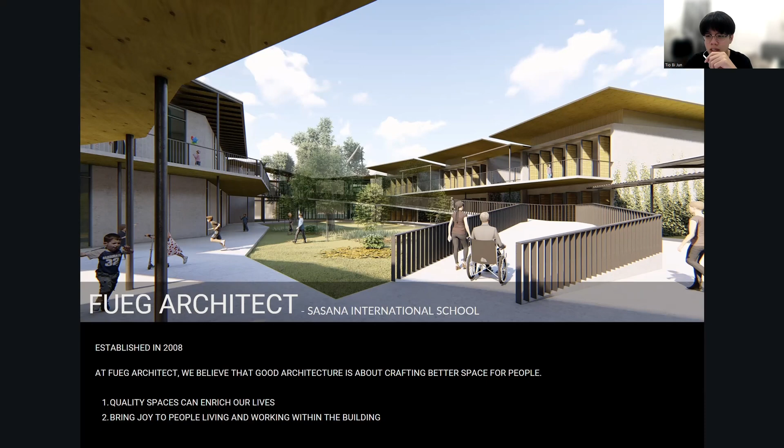Our practice has always been about defining architecture in modernity and practicality, accentuated by the simplistic yet honest design approach.

For example, our office was remodeled from an existing commercial lot design. The intention was to present the office in an open space planning while using selected material to enhance the spatial experience, such as the first one, recycled Cengal wood, and second, polished cement screed flooring. We have used these two materials for the design of our floor.

Then the third one is a raw style feature brickwork, which we used as a hierarchy element in our office. The last one, we used cement finishes and white plaster ceiling to design the ceiling, so the ceiling displays the beauty of even unpretentious design.

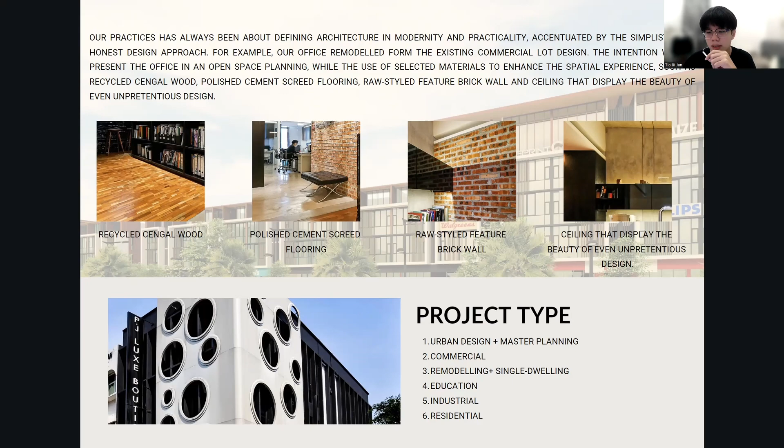FUEG Architect is involved in urban design plus master planning, second, commercial, third, remodeling plus single dwelling, fourth, education, fifth, industrial, and the last one is residential.

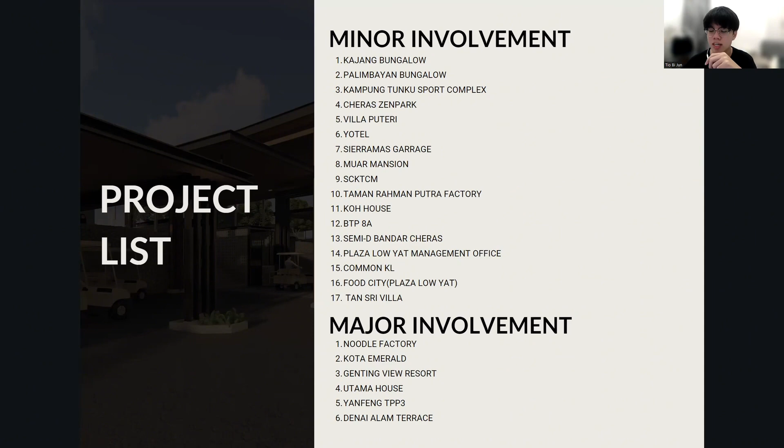Throughout my 6 months of internship, I have separated my projects into minor involvement and major involvement. The minor involvement means the project involved me only a little, but the major involvement is the project fully handled by me.

Kajang Bungalow: the client has bought an existing bungalow at Kajang area, and he required us to design the layout of the existing bungalow according to his family needs, and also an extension at the back of the building. We designed the extension area according to the existing bungalow design language, so it looks harmonious with the existing bungalow. The job involved was I was assigned to amend the drawing, including the plan, section, and elevations according to the client's comments.

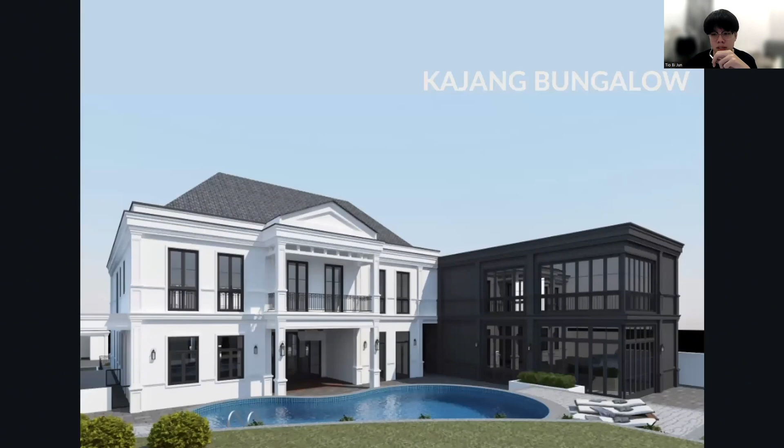The extension part of the Kajang bungalow was the black painted building as shown in the slide. The two drawings shown here are part of the drawings prepared by me.

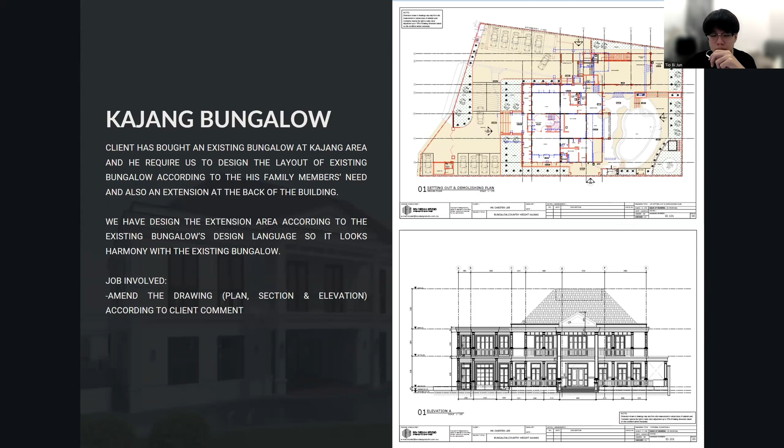Palimbayan Bungalow: this project is 3 different design and build hillside bungalow projects from our company, located at Palimbayan, Kuala Lumpur. The first one is a 1-story bungalow, second one is 2-story, the third one is a 3-story bungalow. The job scope for me is the case study of the bungalow and also designing the circulations and function space of the bungalow.

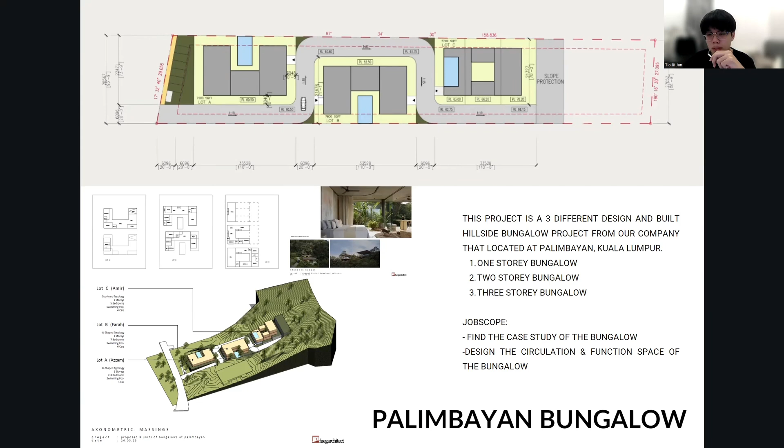Then there's the Kampung Tunku Sport Complex. Kampung Tunku Sport Complex is a design and build project that will be located at Petaling Jaya. We are involved in design, tender, and build process.

The job scope for me is to amend the existing BP drawing, plan, section, and elevation according to the authority's comment, relocate and resize the window and building leveling and the staircase, and I was assigned to do the mood board for the client to feel the real material texture. The drawing shown here is one part of the drawing prepared by me, and the mood board here is the mood board I prepared to present to the client.

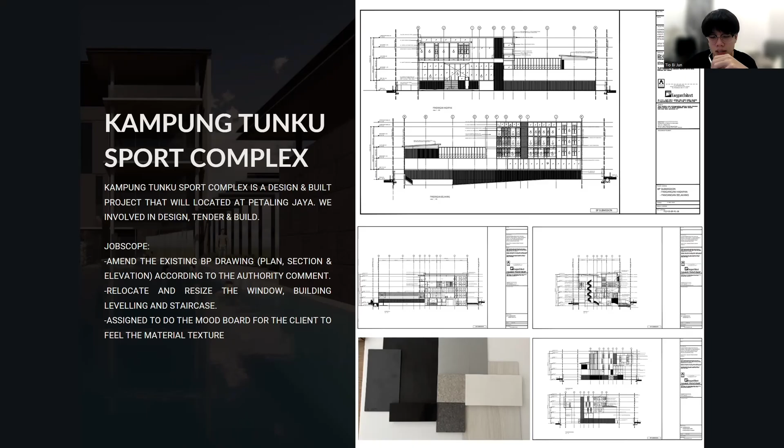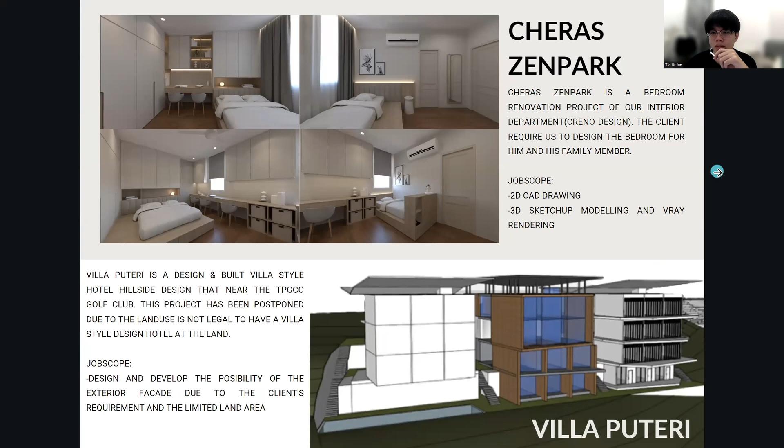Then is the Cheras Zenpark, a bedroom renovation project of our interior department, Creno Design. The client required us to design the bedroom for him and his family members. The job scope for me is 2D CAD drawing and also the 3D SketchUp modeling and V-Ray rendering. The 3D view shown here is after the CAD drawing, then I prepared the SketchUp modeling, and after that used V-Ray to render it.

Then is the Villa Puteri, a design and built villa style hotel at the hillside near the TPGCC Golf Club. This project has been postponed due to the land use; it's not legal to have a villa style design hotel on the land. The job scope for me is to design and develop the possibility of the exterior facade due to the client requirement and also the limited land area.

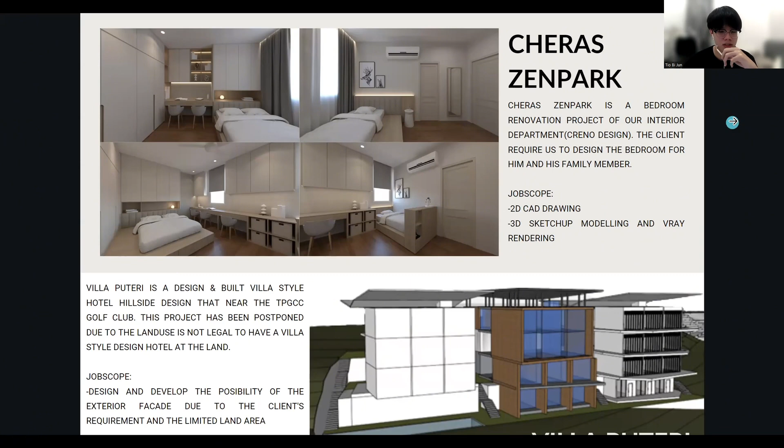Yotel is the existing hotel located at Bukit Bintang area. This project client required us to renovate and design the hotel interior by using as much existing design element as possible. The job scope for me is to amend the CAD drawing, render it, and also arrange it into a portfolio together with the 3D view of each room type, ready to present to the client.

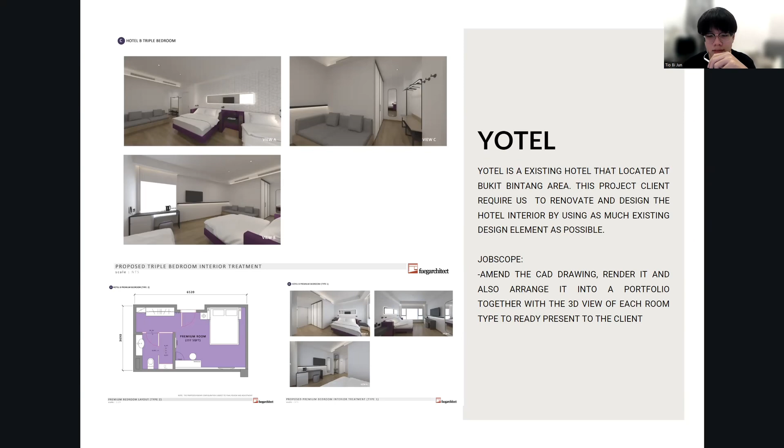Picture shown in the slide, the first one is the 3D vision view. Then the second one is the rendered floor plan. The third one is the 3D view of the type 1 room type.

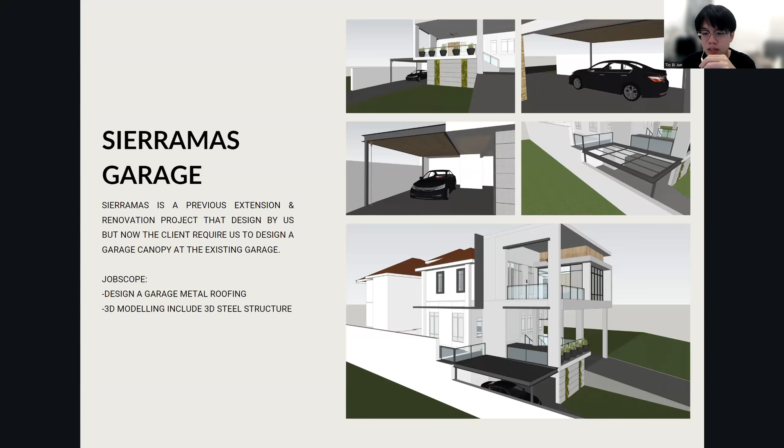Then the More Mansion is a bungalow that required us to do the interior and exterior facade design. The job scope for me is to design the 3D fence design.

The SCKTCM is a charity project that required us to design and draw the lighting and M&E plan for them. The job scope for me is to prepare the RCP of the plan for them.

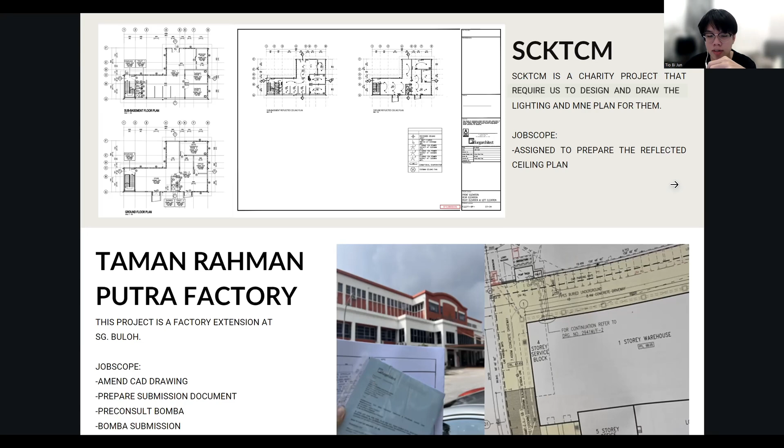Koh House is a design and build bungalow project. The client required us to design the exterior facade and interior design of the bungalow for office use. Unfortunately, after we finished designing and proceeded to the submission process, the neighbor complained and caused the project to be terminated.

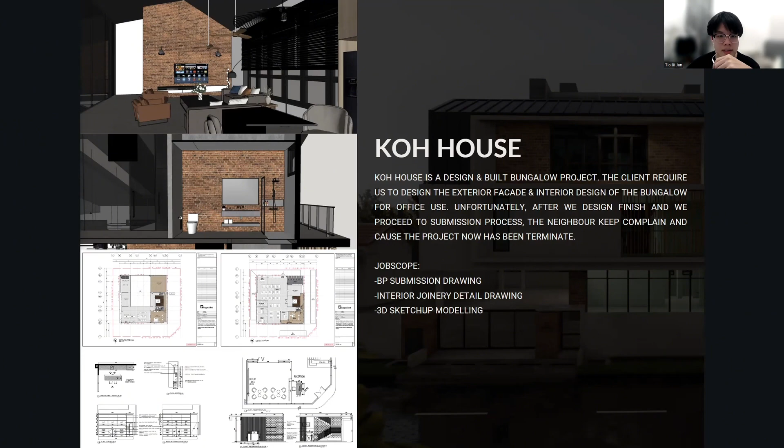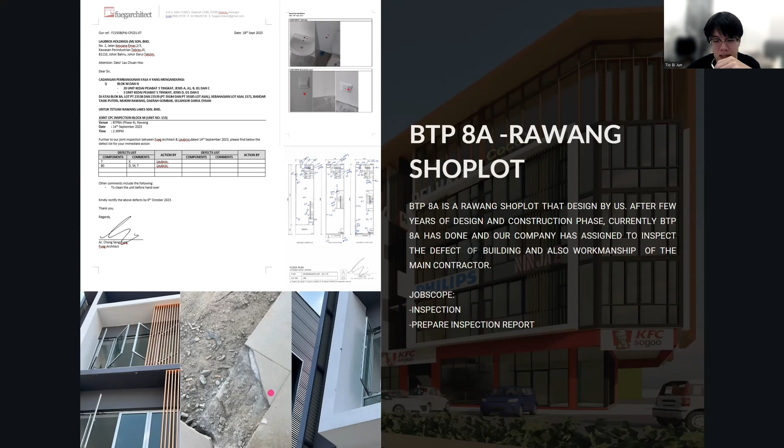The image shown in this slide is the picture that I took during the inspection.

The Plaza Lowyat Management Office is a design and renovation of the Plaza Lowyat existing management office. The job scope for me is to have a meeting with clients and also take some site photos as future drawing reference.

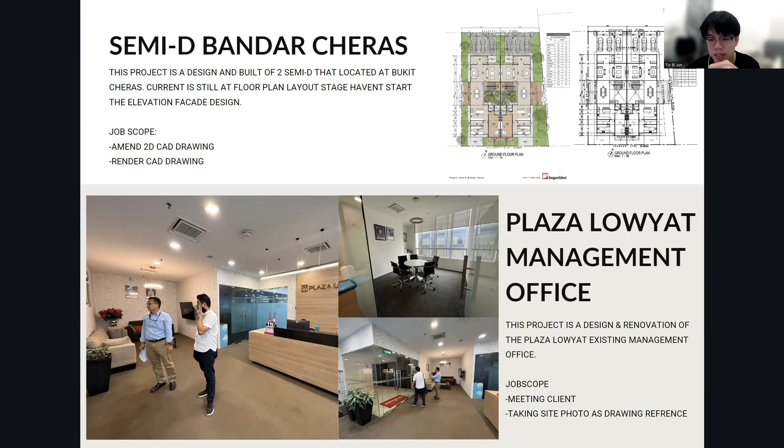Common KL is also a project from the Lowyat group. It is an existing shop lot that is already in operation.

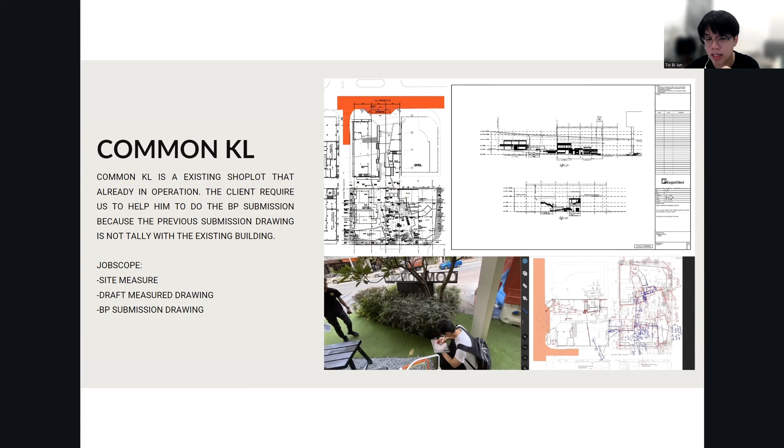The client required us to help him with the BP submission because the previous submission drawing did not tally with the existing building. The job scope included site measurement, draft measured drawing, and BP submission drawing. Both drawings shown here are part of the drawings I prepared. The image shown here is the site picture I took during the site measurement, and the last one is the notes I took during my site measure.

Food City is an all-new proposed food court in Plaza Lowyat. We were required to design it, and I was involved in this project during the tender process. My job scope was the tender drawing, including the plan, section, elevation, joinery detail, and section detail. The drawings shown here are part of what I prepared - the first is the plan and the second is a section detail drawing.

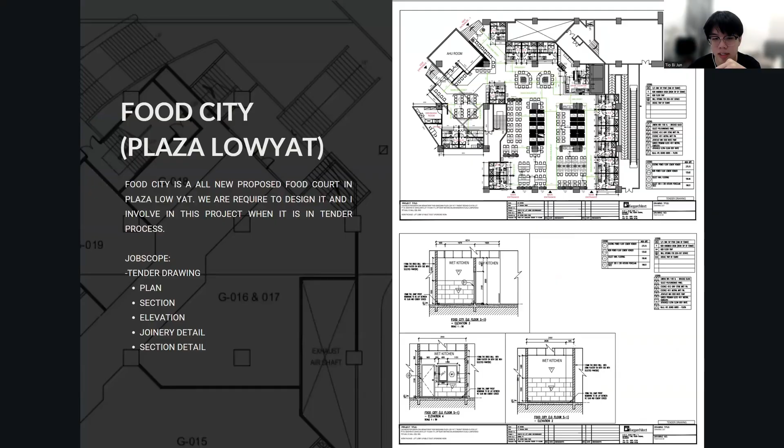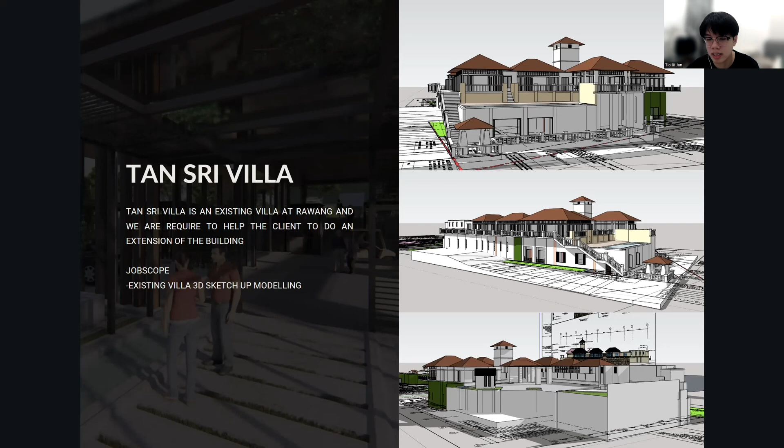Noodle Factory required us to design and build the factory for him. This is my first own project, and I was assigned to design the exterior facade design and also the steel structure support system of the factory. The job scope is exterior facade design and the steel structure support system.

The first image shown here is the steel structure 3D view that I designed. The following two perspective views are the exterior facade design, and the last one is the interior perspective view. Then we move to Kota Emerald.

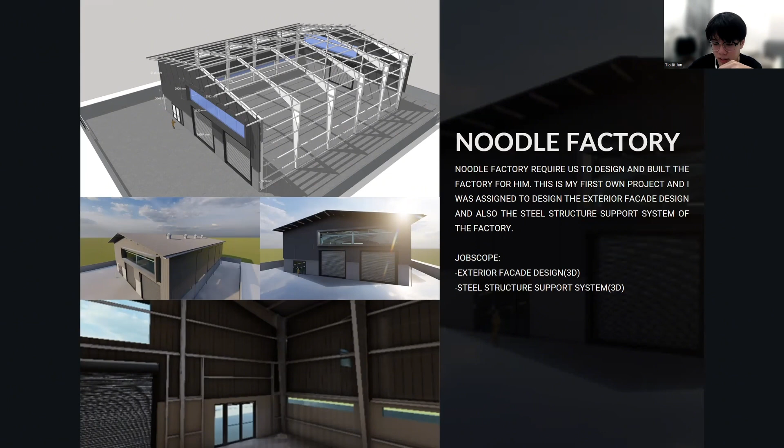Kota Emerald is a cluster house situated at Selayang. We collaborated with TenQ interior design company on this project, so we were required to help the client design the extension building facade and also help with the submission. My first task for this project was to prepare two design proposals for the client to choose from, and finally design proposal 2 was chosen.

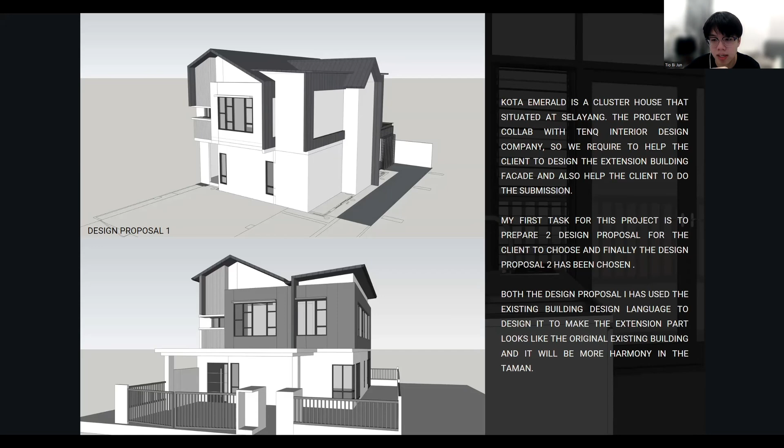All the design proposals used the existing building's design language so that the extension part would look like the original existing building, making it more harmonious within the taman. The picture shown in this slide is design proposal 1, and the bottom one is design proposal 2.

After design proposal 2 was chosen, I further developed the front elevation, the side elevation, and also some interior spaces such as the wet kitchen. For the interior spaces, I added a small courtyard at the wet kitchen. This is because adding the courtyard can enrich the client's life - for example, they can plant some vegetables in it, beyond just aesthetic value. The images shown here are the front elevation, side elevation, and the wet kitchen view 1 and 2.

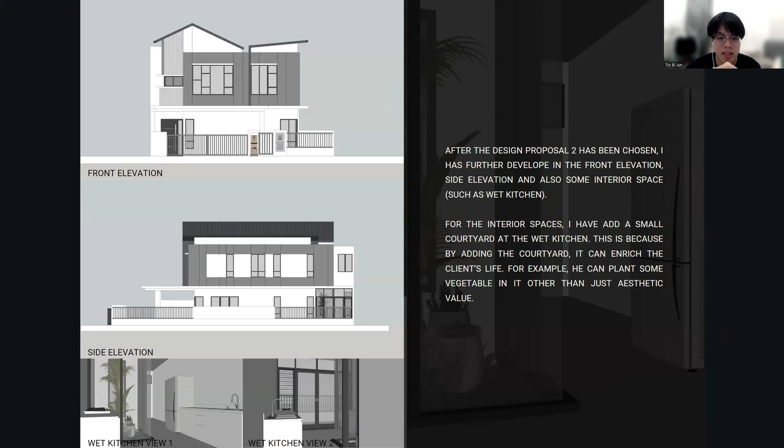Other than the 3D modeling, I also worked on the BP submission drawing, meeting the client, pre-consultation, and preparing the submission document for physical submission. The image shown here - the first one is the site visit photo, the second is when I reached the client's shop for the meeting, and the third is me taking the document to MPS, the Majlis Perbandaran Selayang, for pre-consultation.

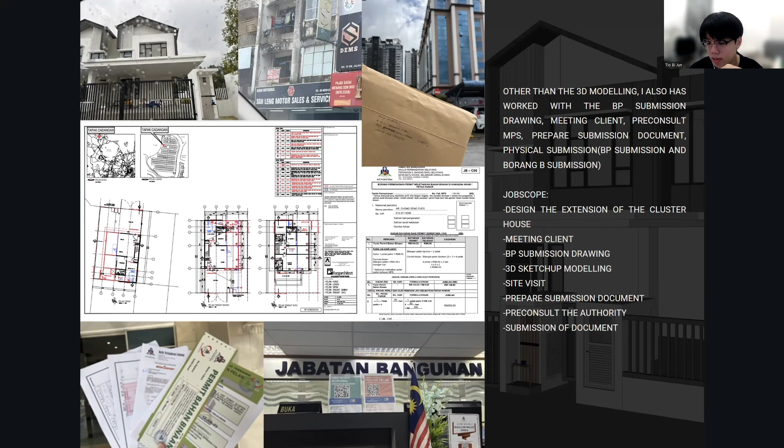The drawing here is one of the drawings I prepared, the BP drawing. Following that is the submission document that I prepared, and finally I went to MPS to physically submit the document. Next is Genting View Resort.

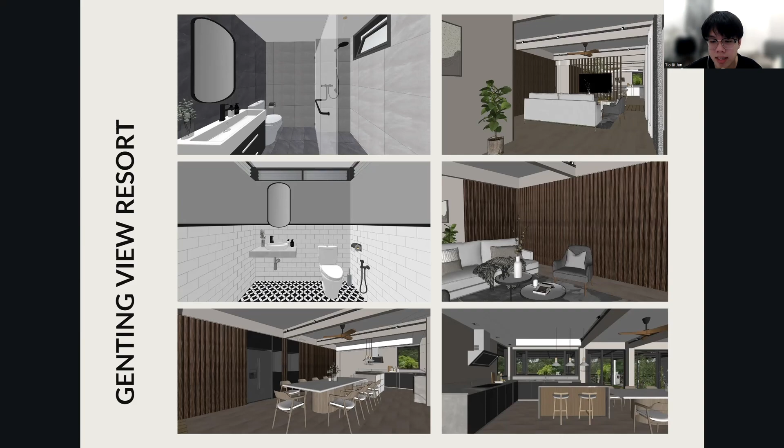As shown in the image, these are some of the views I prepared for the client. The first is the toilet 3D view, then the living perspective view, followed by the powder room perspective view. The fourth is also a living view, the fifth is a dining area view, and the last one is a kitchen 3D view.

Genting View Resort is an old apartment at the middle hill of Genting. The client bought 2 units and planned to turn it into a resort for his family holidays.

The job scope for me: service drawing, amend floor plan, 2D detail drawing, 3D SketchUp modeling, tiles arrangement, toilet fitting selection, site checking, meeting with client, dealing, and meeting with contractor.

The first one is the photo that I take when I go to site checking and visit. The second one is the exterior perspective view done by me. The last one is the table of tiles done by me. We have chosen different toilet tiles for each toilet.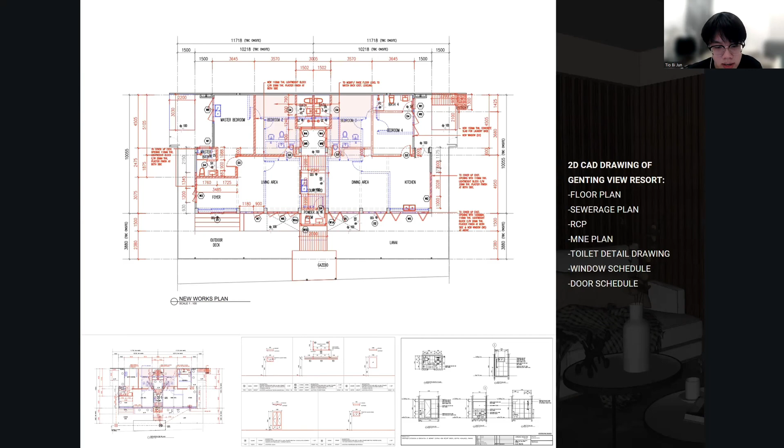The first one is the new works plan. It includes the demolished part and the proposed new layout. The follow-up is the sewerage plan, the window schedule, and finally the toilet detail drawing.

Utama House is an extension and renovation project at Taman Desa. This project is actually my boss' new house, and I worked together with him during the design phase. We try to make the building interior space look seamless, connecting with the outside of the building.

So we use a large number of raw concrete blocks, bricks, timber, full length, full height window openings, greeneries, etc., to act as the main design element in this project.

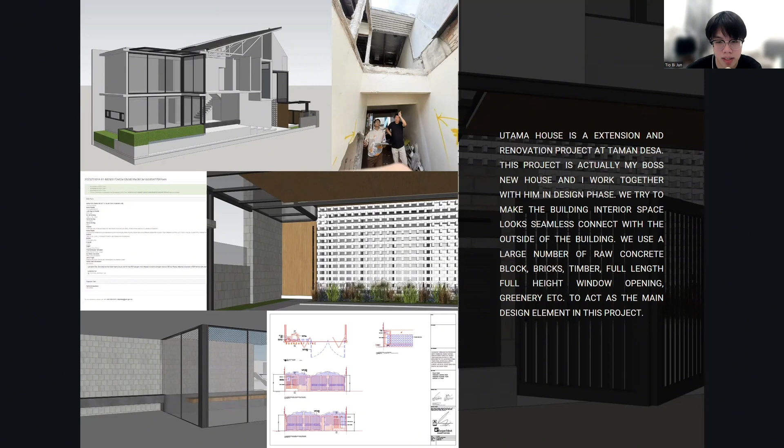The fifth one is the view at the living area looking towards the courtyard. Then the last one is the gatepost BP drawing.

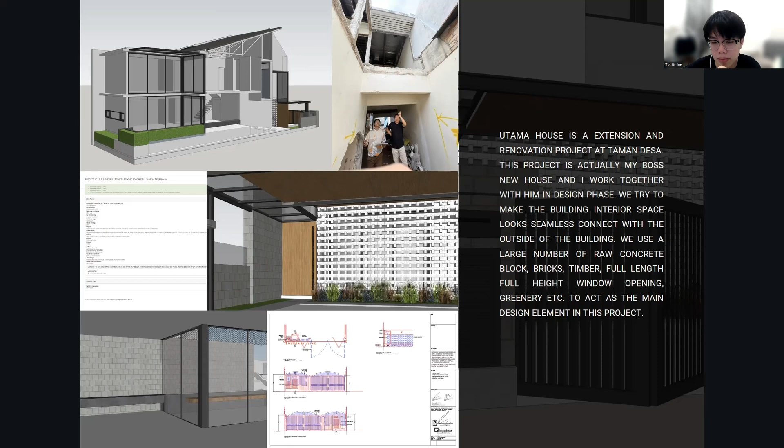The job scope I involved is site visit, site measure, design phase, BP drawing submission, 3D SketchUp modeling, pre-consult at DBKL, and online submissions at the KLIS DBKL website.

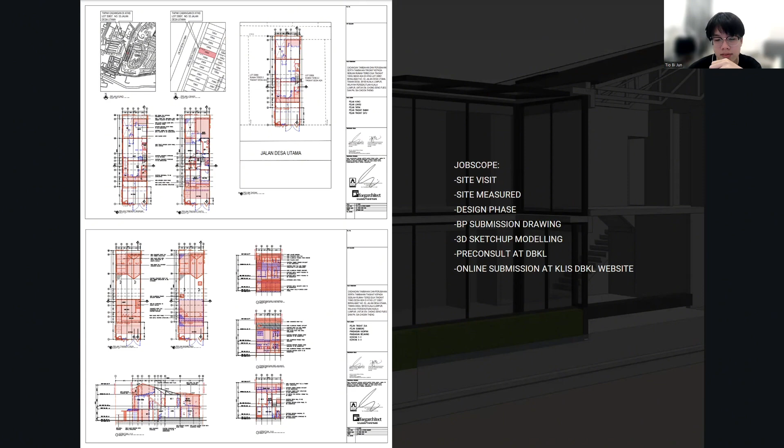The drawings shown in this slide: the first one is the key plan, location plan, site plan, ground floor plan, first floor plan. The second one is the second floor plan, roof plan, section XX, section YY, front elevation, and the back elevations.

Yanfeng TPP3 is a warehouse extension project. It required us to separate the project into two phases. The first phase was handled by my senior, while the second phase was handled by me. The second phase is the office extension to the warehouse area.

The job scope for me in phase one was to draw out the existing warehouse according to the CAD file and also the site photos. The second one is the 3D modeling. The third is attending the bomba inspection and the meeting for the second phase construction consultation.

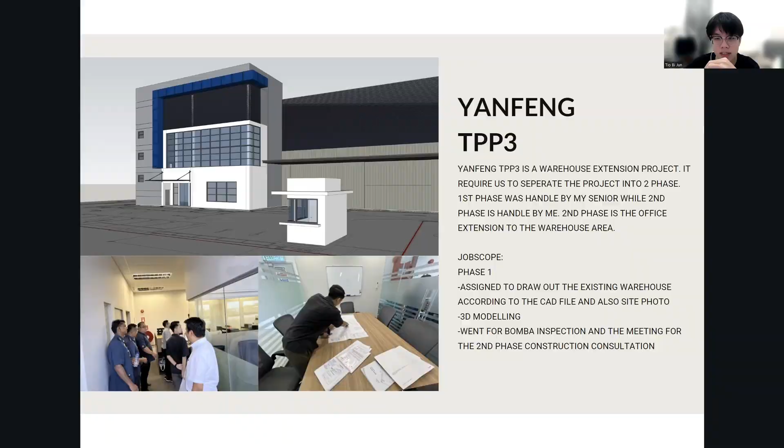Following up is phase two. The job scope for me is the BP drawing, bomba drawing, studying the bylaw book to ensure the bomba drawing meets the bomba requirement, preparing a submission document, and also the BP, OSC, and LAM submission, bomba submission, searching for fire rated window and paint contractor, and meeting with contractor.

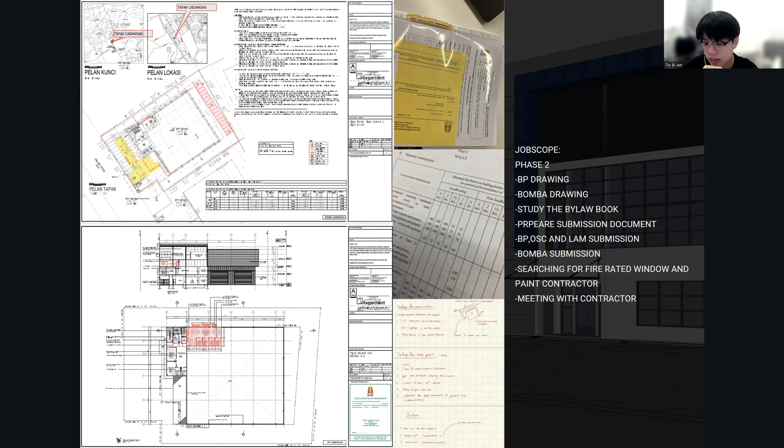The job scope for me is the massing development, functional diagram of the existing and new space in the building, layout design, the CAD drawing and also the rendered drawing, then the 3D SketchUp modeling.

And that's all for my presentation. Thank you.